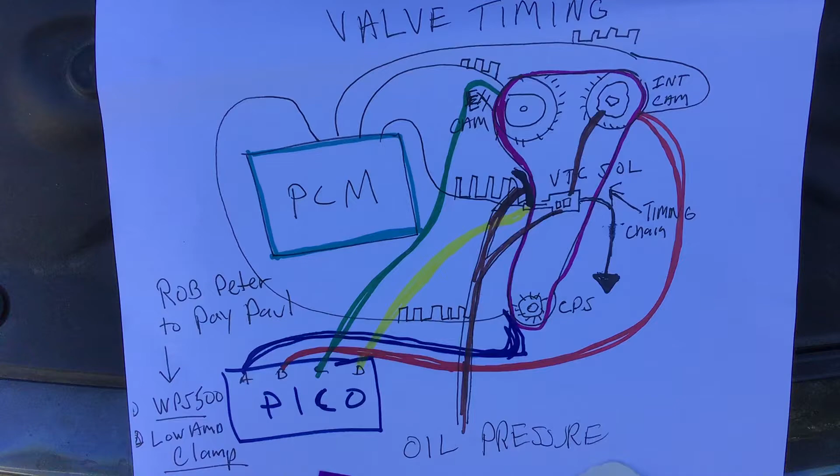This is a variable valve timing training video. This is the 2004 Honda Accord 2.4 liter. We have a variable valve timing system where Honda phases the intake cam on this engine. They do not phase the exhaust cam.

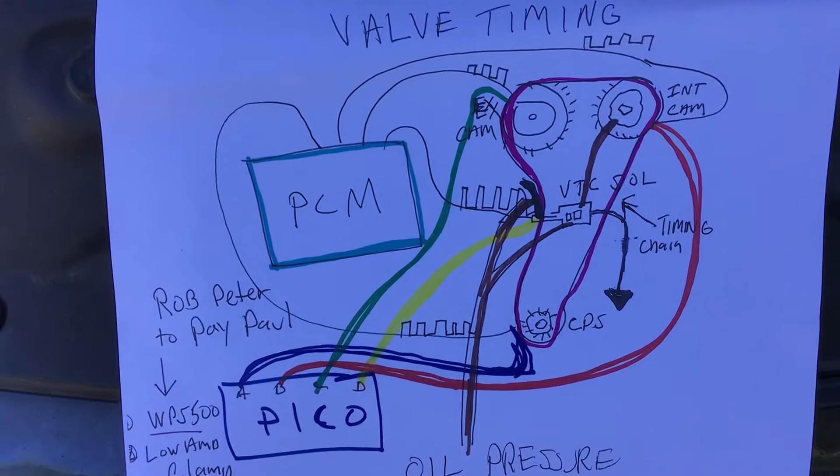As you can see on the illustration, which you want to take a snapshot of, we have some components here. We have a crank sensor down by the crank. Each cam, the intake and exhaust cams, each have their own sensor. We have a solenoid in the front of the engine that is duty cycled, where oil pressure acts on it, and the PCM sends a duty cycle to this solenoid to send a certain amount of oil up to the intake phaser. That's right there.

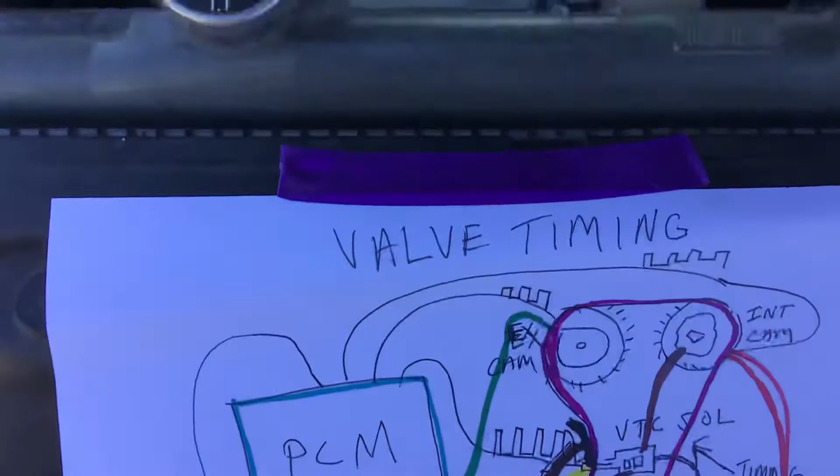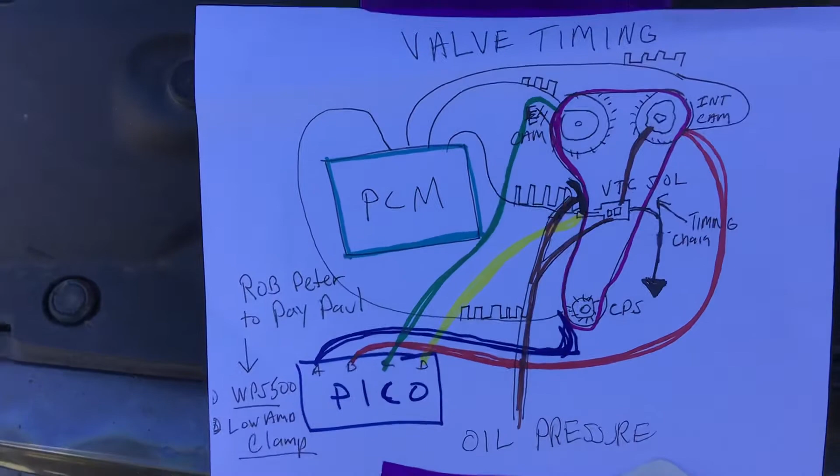And that's going to advance the intake cam, so the intake events are going to happen earlier with a higher duty cycle. So in this video we're going to look at 4 signals first: the crank signal, each of the cam signals - the intake cam and the exhaust cam - and the duty cycle going to the VTC solenoid. It is power side switched from the PCM.

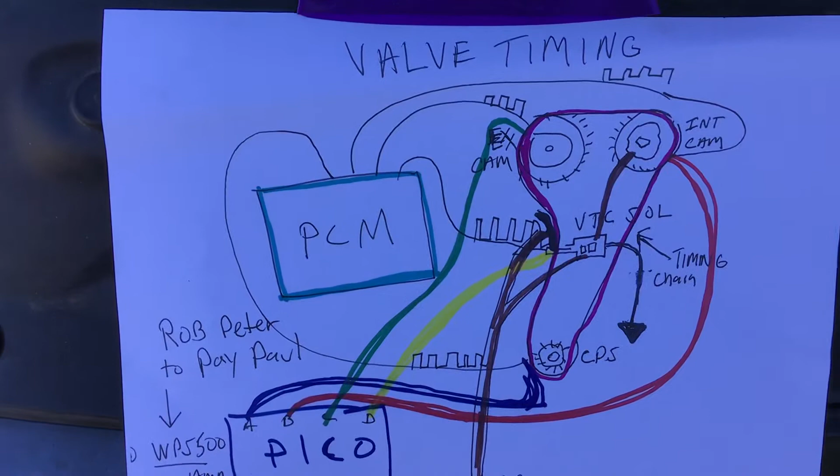One of the most important things to remember when troubleshooting one of these systems is that the quantity of oil is correct. You never want to be low on oil. I added 2 quarts of oil yesterday, and that was my own oversight. Always keep in mind that oil and oil viscosity is super important for this system to operate properly.

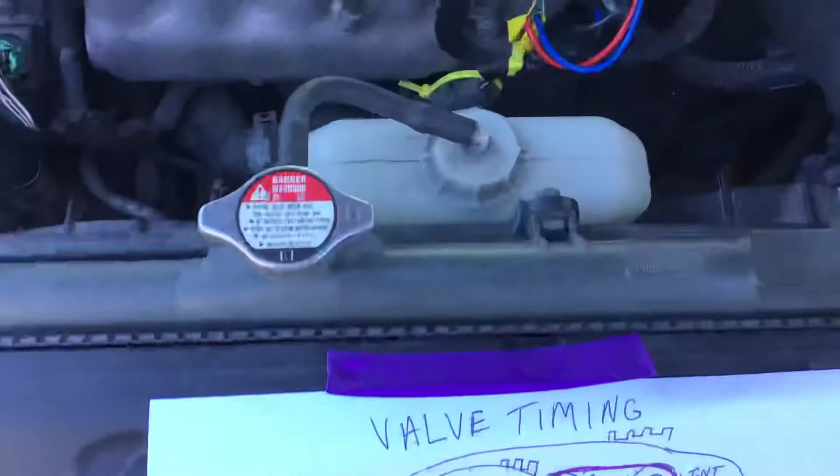Another thing I want to comment on: this car has VTEC, which is different than variable valve timing. VTEC is over here in the back. I don't know if you can get that solenoid - that's a different one, well, you Honda guys probably know what I'm talking about. It is a solenoid that sends oil pressure. It is reliant on good oil pressure, as is the variable valve timing.

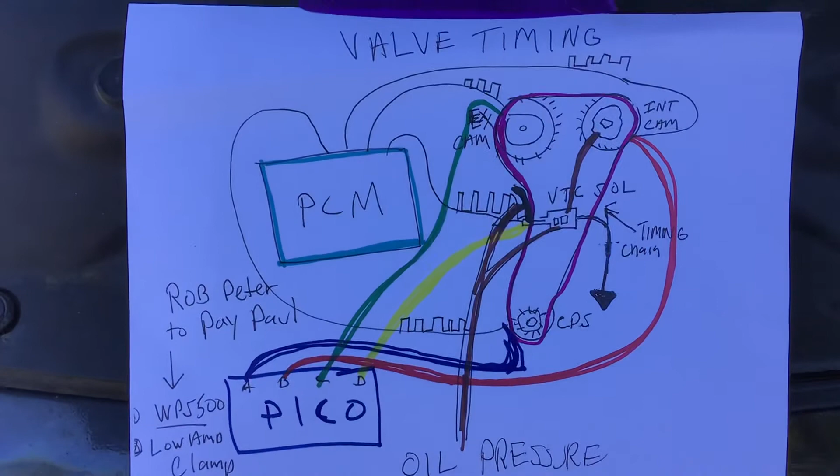Yet what it does, it sends oil pressure up through a solenoid commanded by the PCM to the rocker shaft to get in and move a pin to latch the rocker arms onto a cam lobe that has a higher lift. It does that at a certain RPM, and the variable valve timing is not that system.

What we're going to talk about now is phasing of the intake cam in this system. So basically, let's go to the scope. We're hooked up, we have 4 channels, and let's get locked in.

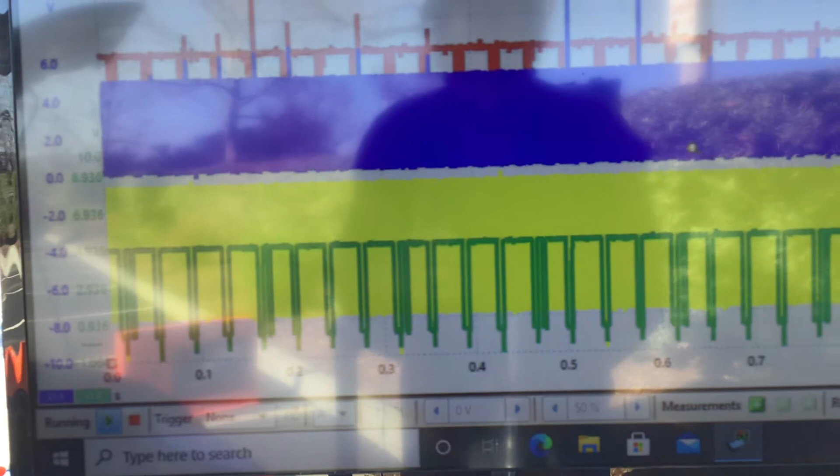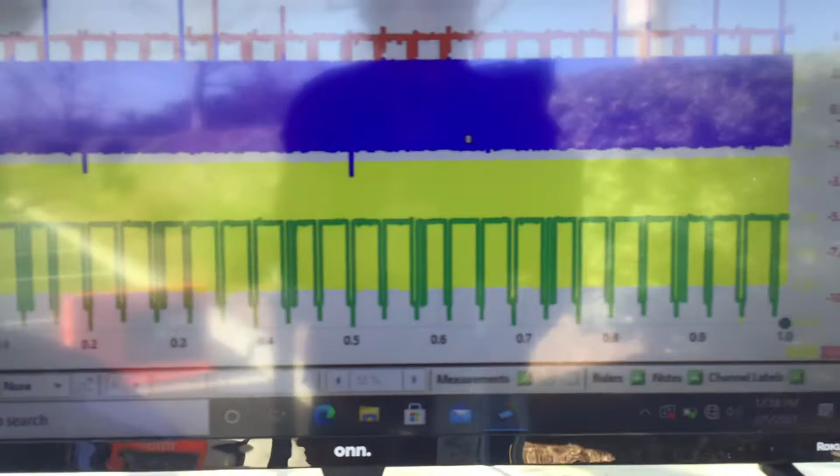And we can see that scope - that's a snapshot you're seeing there. I'm going to start the scope. We're going to see what it looks like idling and talk about it. Let me stop the scope.

Now we'll start it. Now we're running, and we can see on the scope we got a fairly long time - 100 milliseconds. So the green, the yellow and the blue look kind of thick. The yellow is the crank sensor - sorry, the yellow is the duty cycled command to the VTC solenoid. We are idling about 750 RPM. I will stop the scope and stop the car, and we'll talk about it.

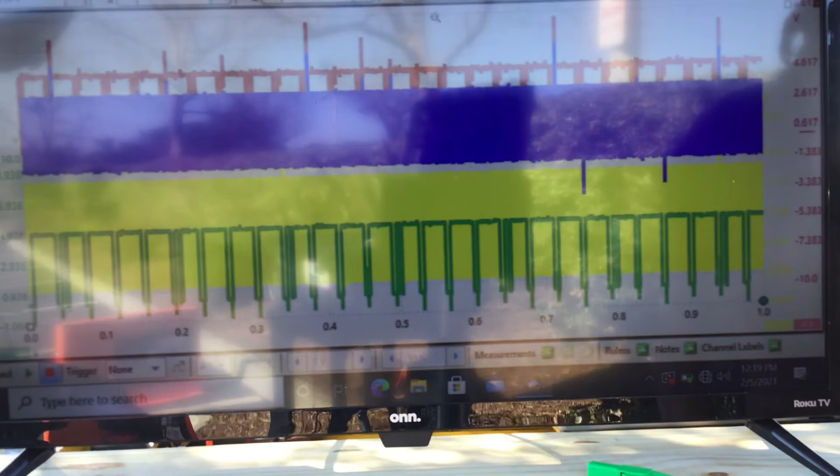So what we have here is a crank sensor in blue, an intake cam in red, an exhaust cam in green, and a duty cycle in yellow. That is an output - we have 3 inputs and 1 output. So we'll look at a fire cycle, which is 2 crank revolutions, and we'll know what we got here.

Okay, we can see at this stage our cam is not phasing. Our duty cycle is not really an effective duty cycle as far as moving that solenoid. It looks maybe more like what they call a ping signal, or the PCM may want to check the circuit, but basically the duty cycle is very low, not enough to get current to flow through the solenoid to phase the intake cam.

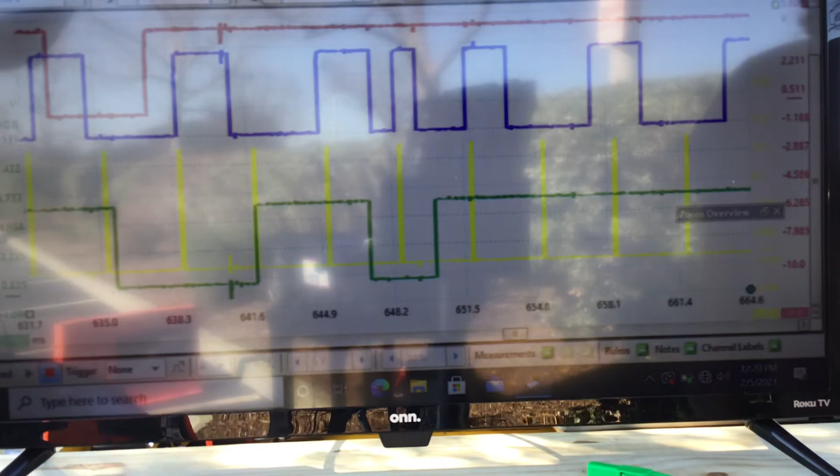So basically, let's look down at this. I'll give you a real zoomed in shot, and you can basically see that's not much of a duty cycle - I don't know, maybe 1 or 2%. But that will change when we phase, and the intake cam, which is in red, the events will happen earlier. So intake valves will open earlier and close earlier, moving this way. Let me get a still shot of that, and right here.

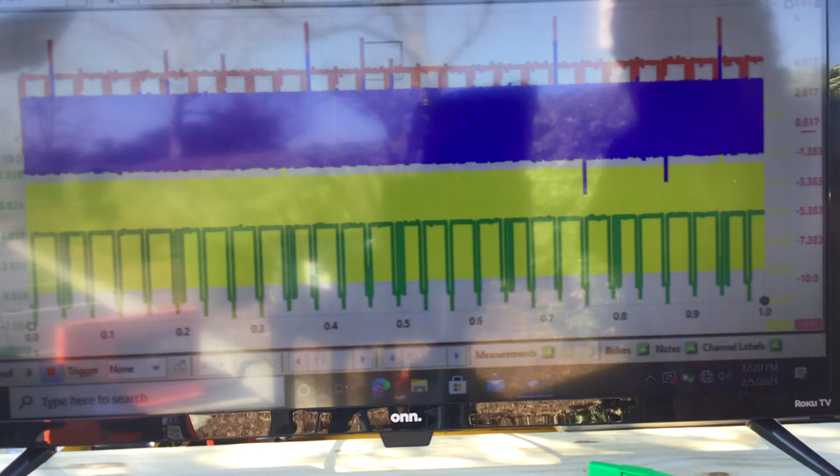Okay, in blue we have the crank, and in red we have the intake cam. So the red will actually be moving this way when we phase.

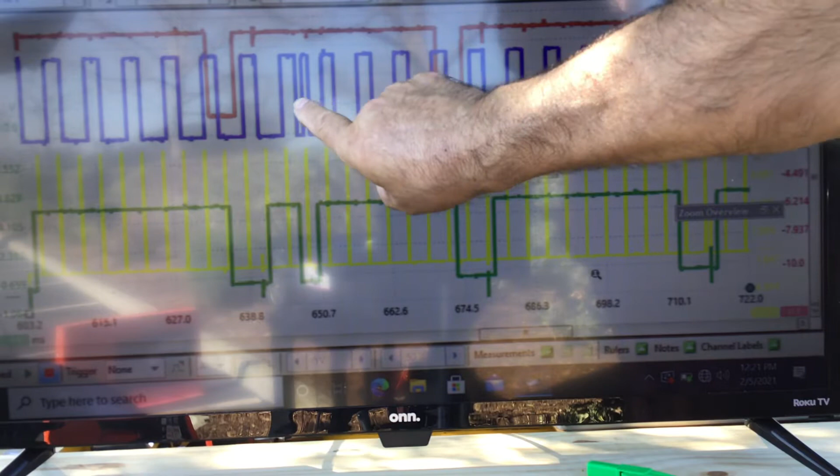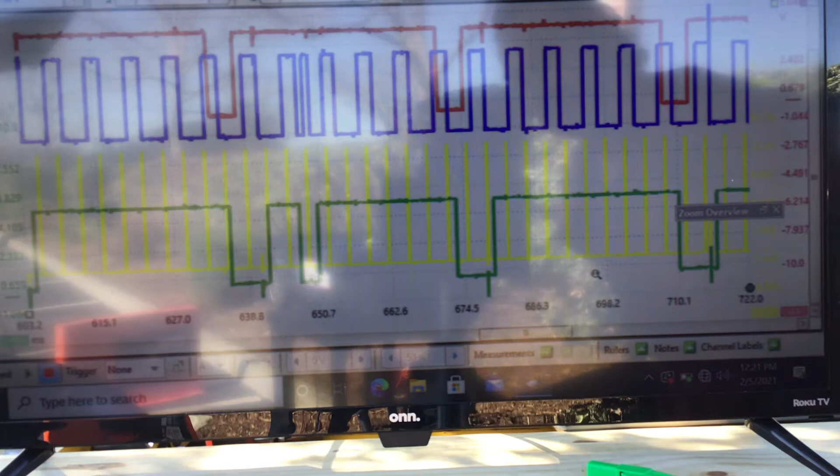Let's look at a test point and see if you can measure some degrees. Basically, if we look at our signature notch, our skinny notch on the crank, we've got two normal sized notches, and that's where the intake cam is. So take a snapshot of that, and look when we start to phase, when the yellow starts to increase the duty cycle, that's a command from the PCM.

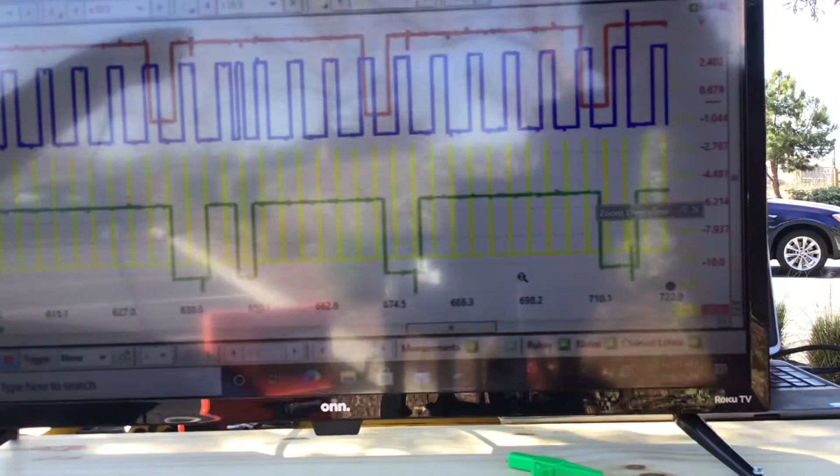oh boy, okay, all right, okay, my bad. Okay,

The yellow signal will move this way. It will move to the left on the screen, and the bottom of a scope is like a clock - this is time, and this is earlier than this is. So the event will happen sooner as the duty cycle increases and the PCM commands the intake cam into a different spot.

So here we go. We're going to start the car, get the RPM up and get the load up, and we will take a look at the phasing aspect.

Okay, I'll start the scope. Looks like we're running.

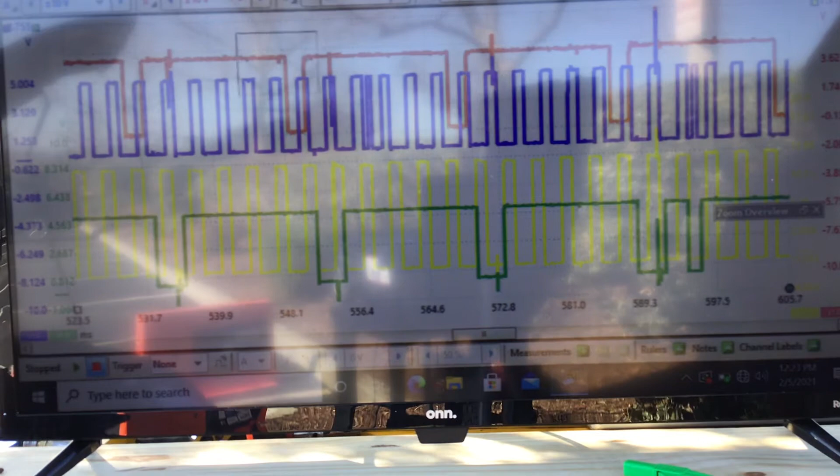So let's take a look at that cam to crank relationship again. Remember where we were? We were here, and then the two notches. Now we've moved a bit.

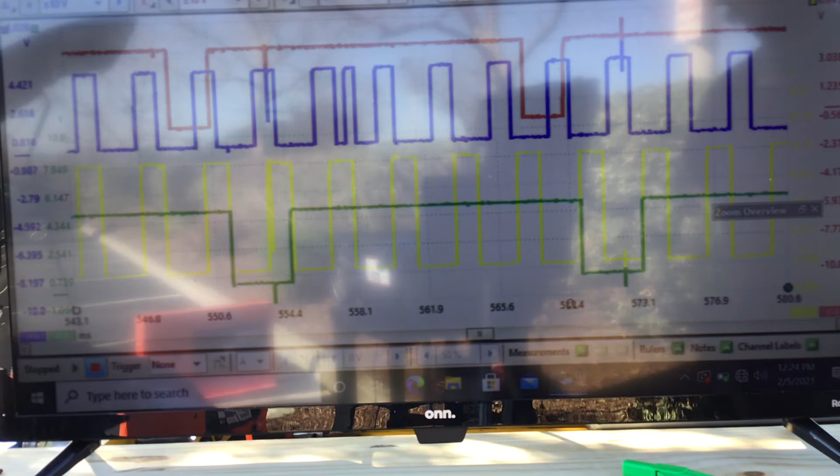Now if we want to get some degrees, I'm going to go back and we're going to look at degrees and see what kind of improvement, what kind of advance the VTC solenoid had an effect on the intake cam. Go back to where it's idling, and we will look at the duty cycle.

Okay, right here we're kind of in that idling phase, and I want to get some cursors up so we can start to measure some degrees. We don't want to just go by eye - we want to measure.

Okay, so we're going to take a fire cycle, that is from here. Let me get a little bit into here. No, okay, hang on.

Okay, so we'll go from here. We're going to look at 720 degrees. I want to be at the downside of the skinny notch, which is right over here. Okay, and we'll start looking at degrees.

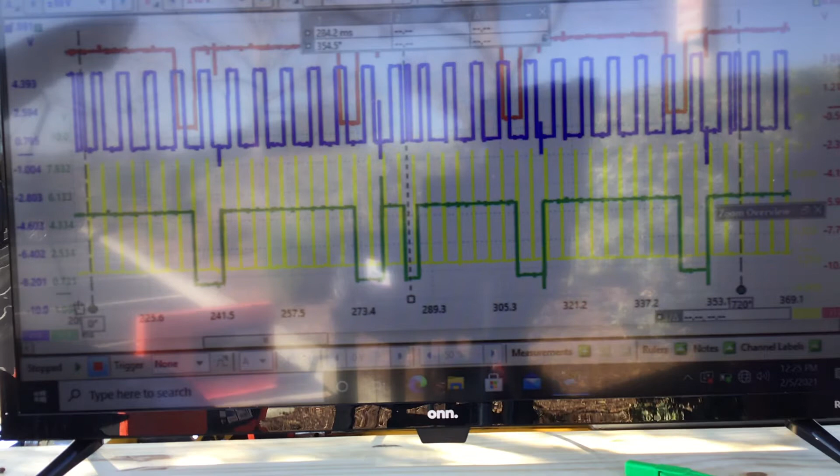Now, as we measure degrees from the front of the skinny notch, the signature notch right here, okay, right about here, to the intake cam, we're going to see we have a 50-degree difference.

Now I'm not saying that's 50 degrees of advance, but that's a difference. So this is all live. We want to see what happens when the yellow signal jacks up - we see some actual duty cycle where that solenoid can move and have some effect on the intake cam.

So what I've got it at now is from that signature notch on the crankshaft, the skinny notch, to the first downward notch closest to it on the intake cam, I'm seeing 50.76 degrees. So let's go to an area of the capture where the duty cycle is effective and did in fact advance the cam, which I have yet to prove, but we'll see if I can.

Let's see what this thing looks like. We've got some duty cycle. Do we have duty cycle? Okay, that looks like a pretty good duty cycle, I'm going to say about maybe 40%, 40 to 45%. And let's look at the effect.

Now we'll take a capture of a fire cycle, that's two crankshaft revolutions, and see if we have more advance than that 50 degrees we had. So here I am, I'm going to do the same thing with the cursors - we're going to go to the downward on the skinny tooth, another one over here, that's 720 degrees.

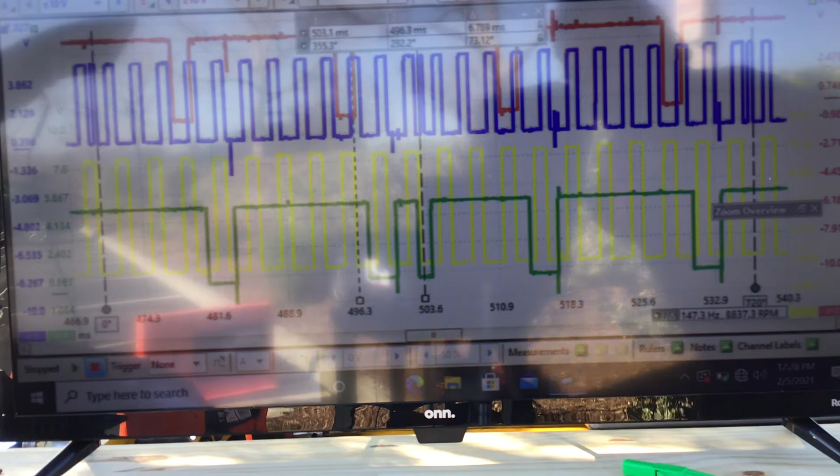I'm going to add something else to it. I'm going to trade out one of my channels here to show current flowing through that VTC solenoid. The exhaust cam, I'm just robbing Peter to pay Paul. We don't really need the exhaust cam because that is a non-phase camshaft. So let me take a little change here to the scope.

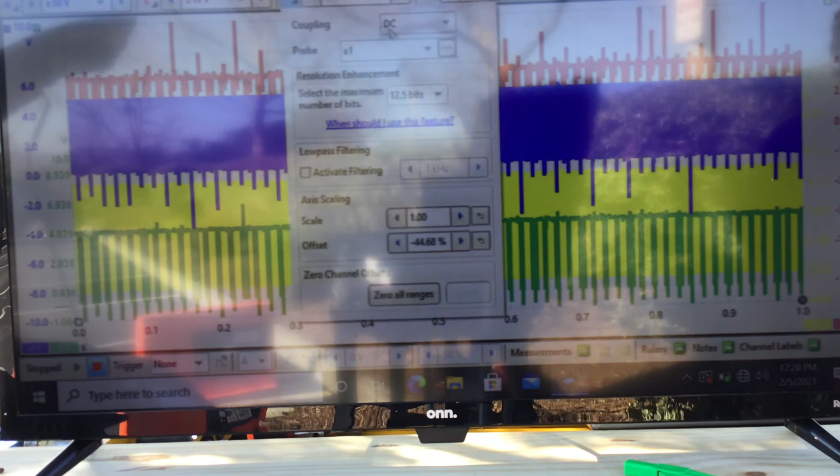I'm going to put an amp clamp around the VTC solenoid. As you look at your illustration, you'll see where I say rob Peter to pay Paul. I'm going to change out the green channel and add an amp clamp. If I can get my buttonology worked out, we'll add a 30 amp pico clamp to the wire from the PCM that is duty cycling. We'll see the current duty ramp up to that solenoid, so we know the solenoid's actually pulling amperage, which validates that it's moving.

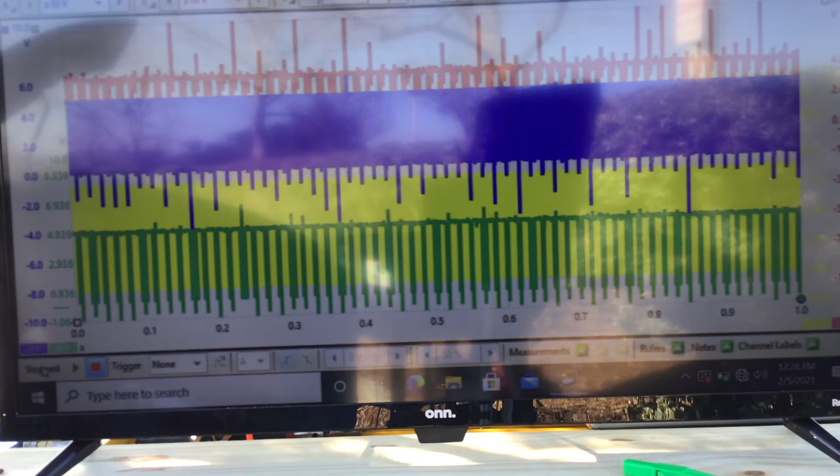Let's get that thing hooked up. Don't forget to change the channel on the scope here. Okay, get this green guy out of here. We want to hook the amp clamp to it, so it's going to look like a different signal. We're going to see a current ramp. Let me know, okay, so here we go.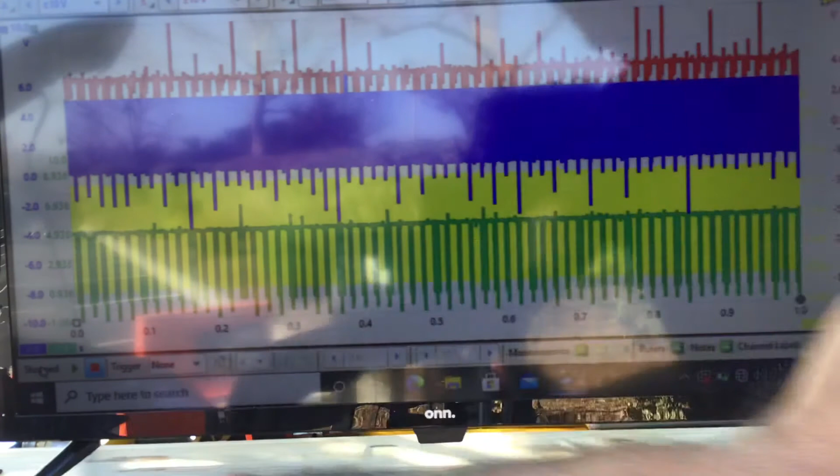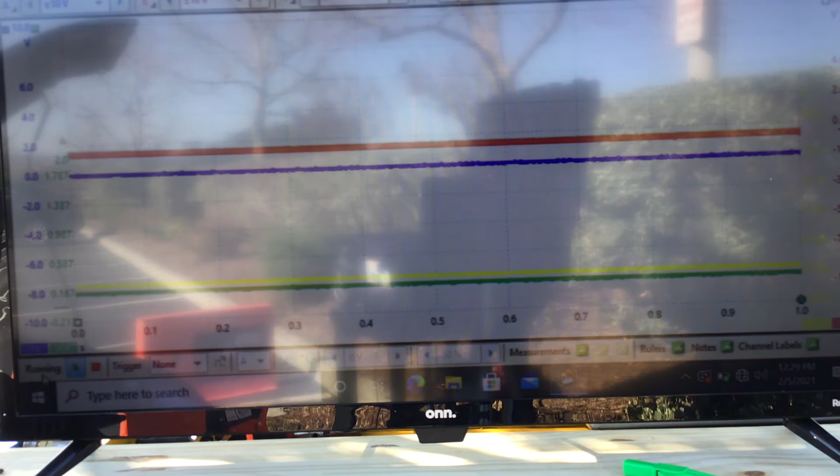Okay, let's start the vehicle. Right now we can see our green channel. Let's put our green channel in front of yellow so we can actually see its effectiveness. Okay, well, all right, there we go.

I'm going to give it some no-load RPM just to see if I can get that. You'll see that solenoid sort of ramp up and move. Upside down, my bad.

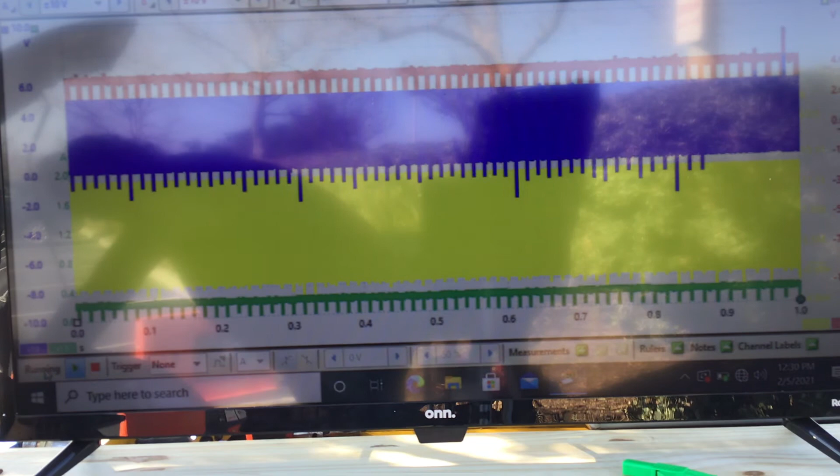All right, we can see the solenoid actually drawing amperage, which would coincide with our duty cycle. So I'm going to take one more shot, this time with some load on it. I'm going to power brake it. I want to get a more realistic perspective of this, so I'm going to go inside and power brake it and see what we got.

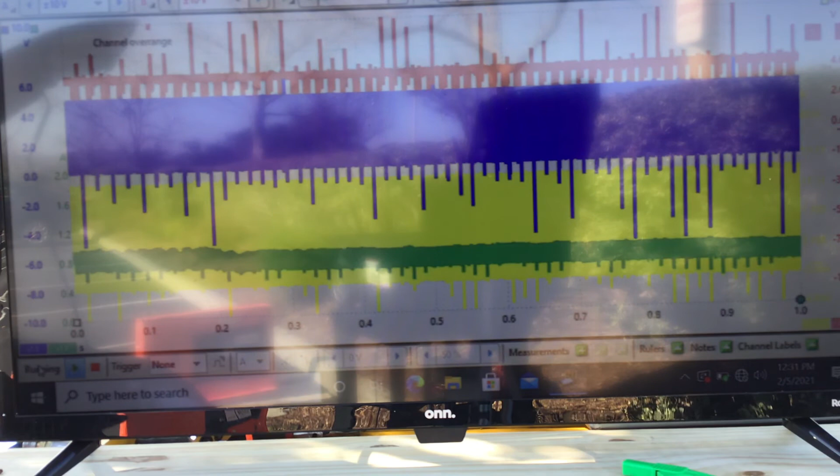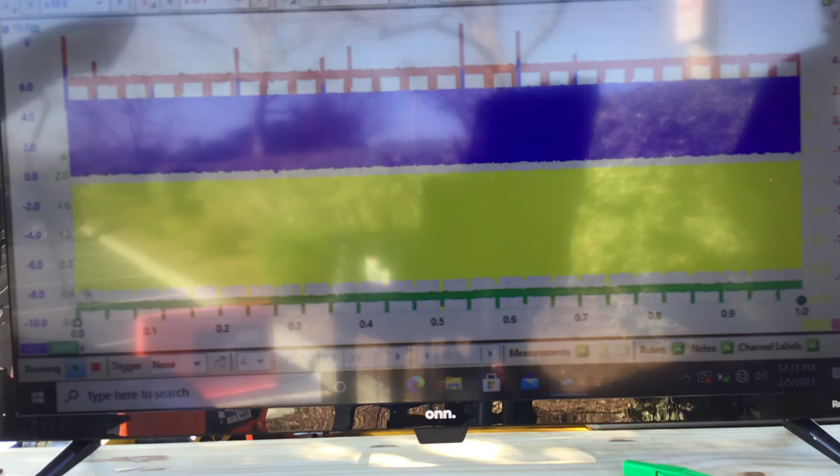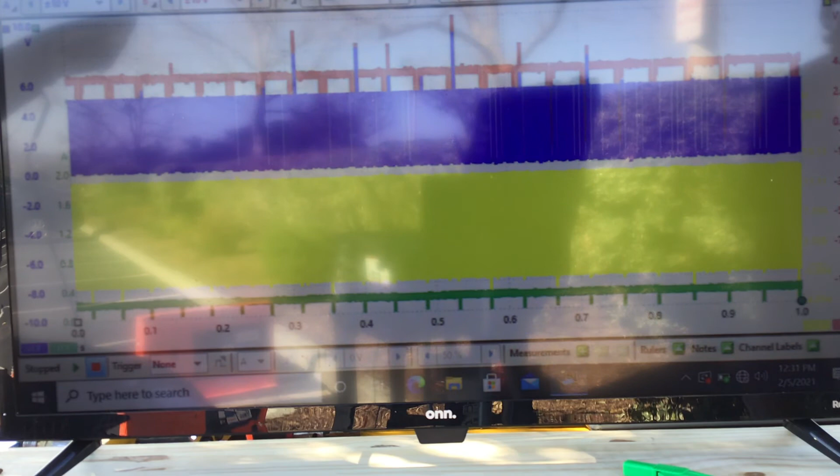Let me stop the scope and we'll roll back to see where we had a rise in amperage. A rise in amperage should also coincide with a higher duty cycle. As we roll back, okay, there's a rise in amperage. It's kind of staying with... okay, right here we can see where it rose and it went down because it is under the PCM's control. The PCM decides how much duty cycle it wants. So right there, that's our current.

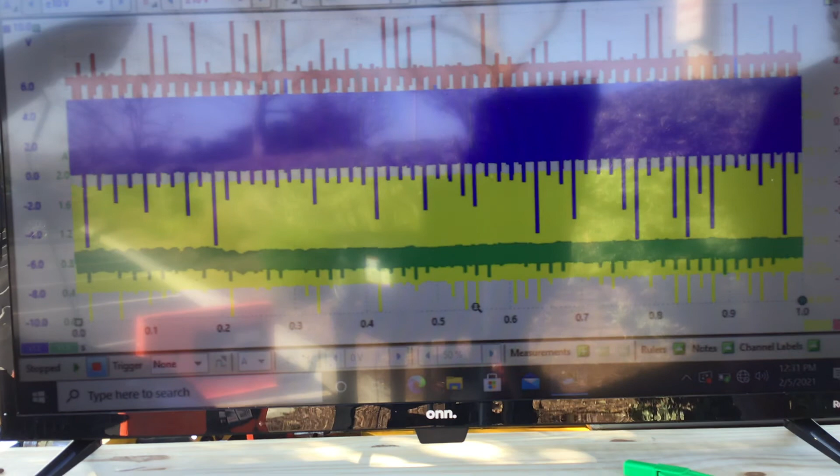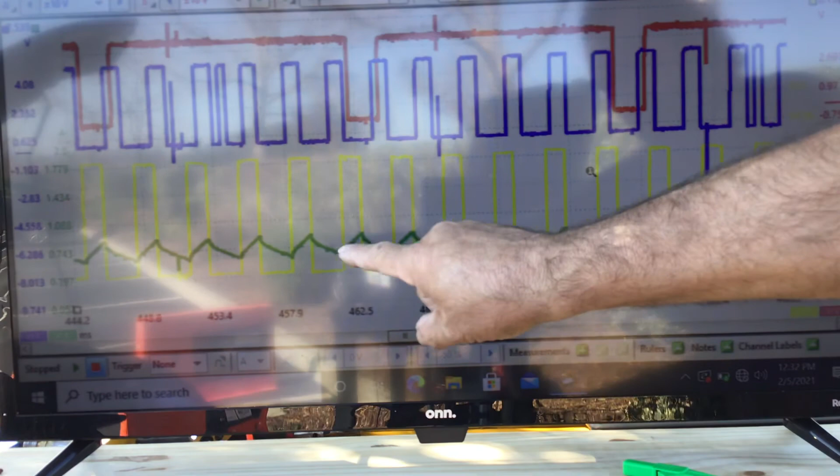I'm going to go back to show an idle shot of the cam and the intake cam to crankshaft correlation. Right there you can see it. Kind of freeze it, take a snapshot with your phone or something, and I'll roll it back to idle to see the difference. So we are, I'm going to say, 2.5 notches right there. Let's see what we look like when we are idling.

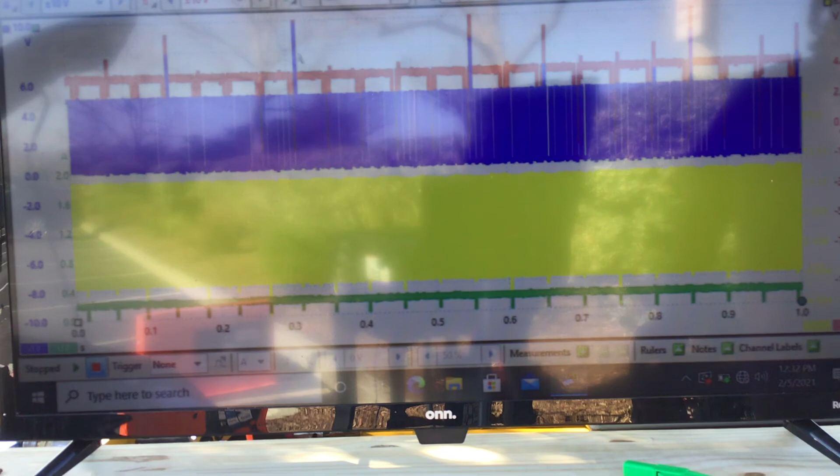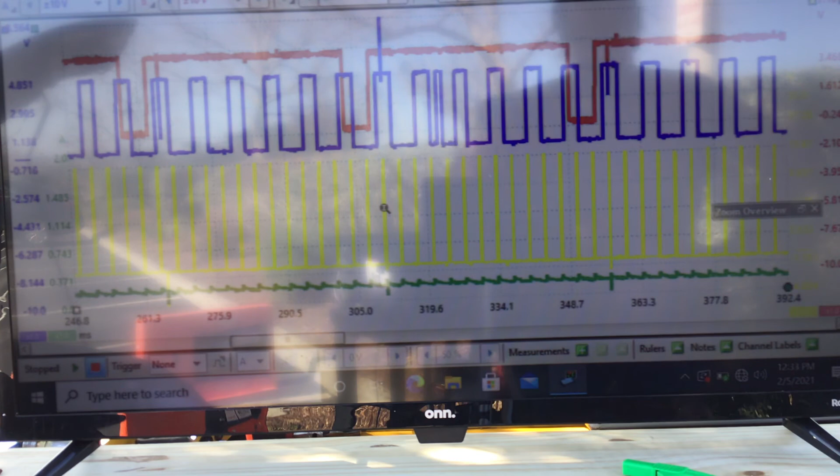So as far as this video, this is a really good way to validate that our variable valve timing is working. I hope you enjoyed it. I will come back with a part 2.

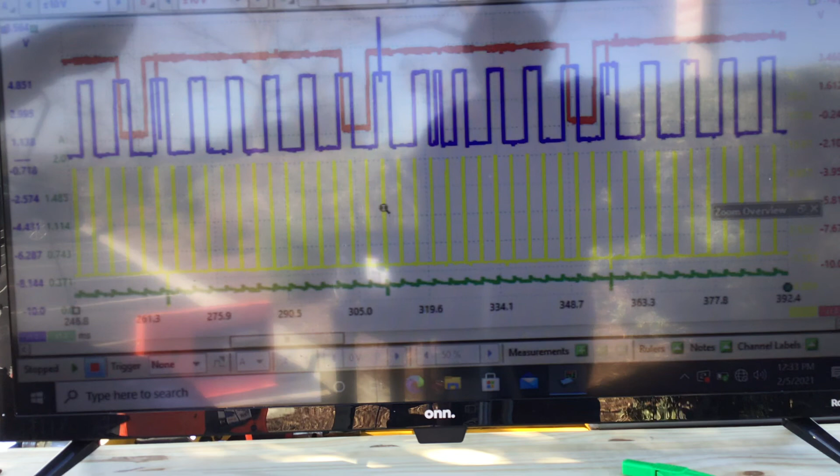I'm going to do something else very similar to this. But anyway, thank you. And Gary, hope you're doing well and have a good trip, my friend. I'll talk to you soon. Bye-bye.